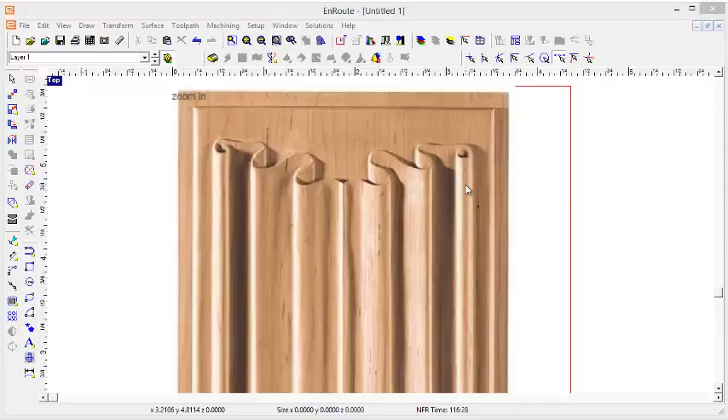In this movie, we're going to show how to create a piece of Linenfold relief for a surface for use in an architectural or woodworking setting. We're going to use this picture here that's showing what we want to create to help generate the geometry that's needed.

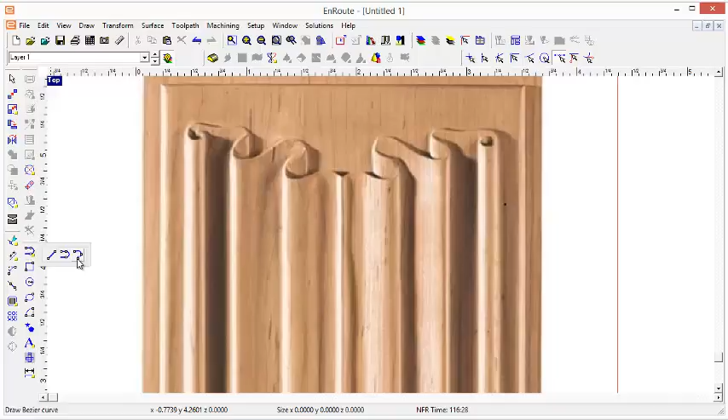So I'm going to go here to the Draw tool and choose Draw Bezier Curve. Before I get started, I'm just going to zoom in here a little bit so I can see the area I want to draw in.

I'm going to start here at this internal point, and if I just hold down on my cursor, you can see I'll create the curve as I go along here. I'm probably going to end up coming back and cleaning this up a little bit when I get a chance.

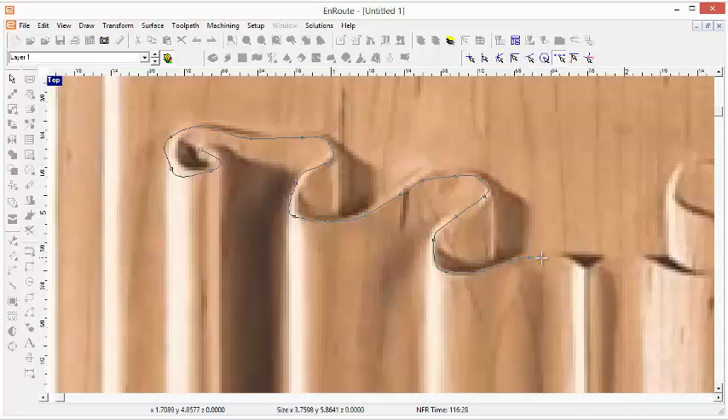What I'm trying to do is get a decent job of drawing a smooth curve to start with. So I'm just going to meet in the middle there, and now I can see I've got a little bit of a curve here. I'm going to zoom in on this, go to the point edit mode, and try to make this look a little better.

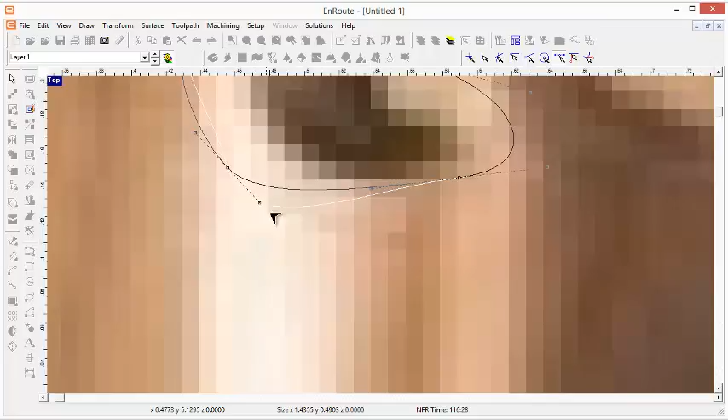So we'll start off by grabbing these nodes and shortening some of these curve motions here. There's a bit of just getting in there and making sure you have good shapes, and it could be time consuming based on how good a job you did starting this process to draw this line. But each of these little curves will have its own handles.

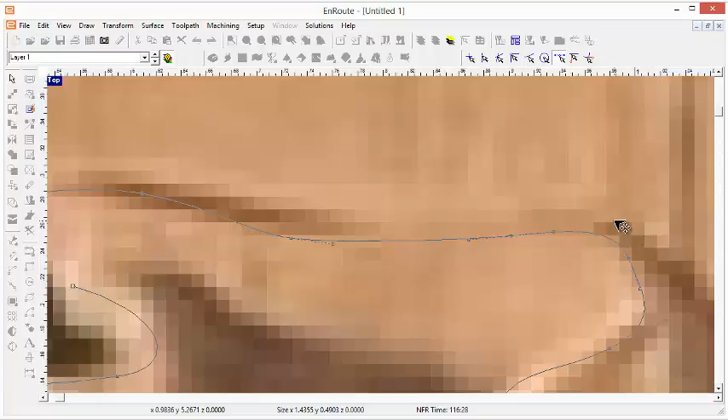If you hold the shift key down, then you can get an idea of what it'll look like for both sides to be changed.

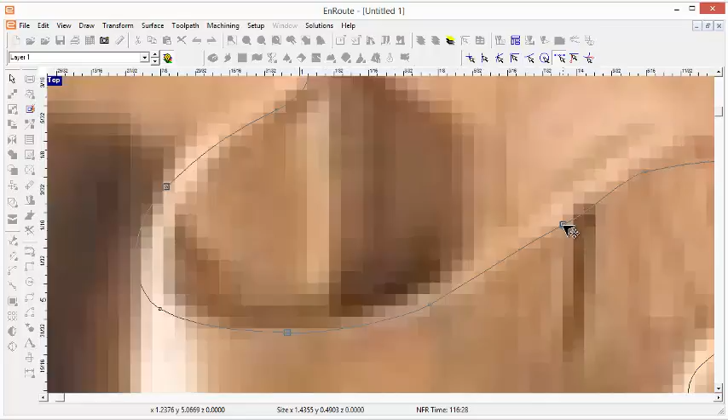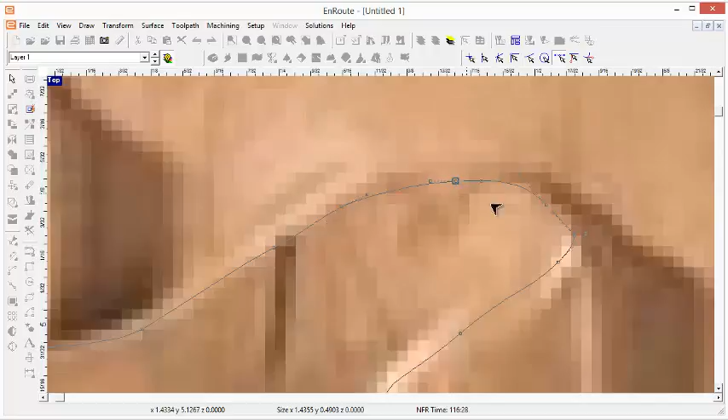Alright, so we're getting through here pretty quickly. A little bit there needs to be straightened out. This is the sort of thing where you can end up spending as much time as you want making sure everything looks good here.

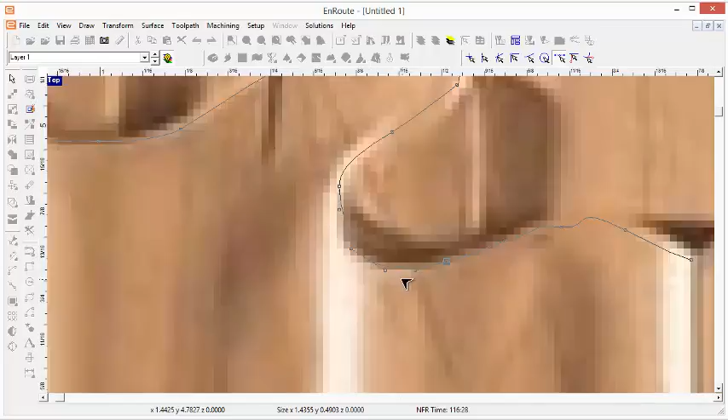So I'm going to go through this somewhat quickly, but again, this is an area where if you want to spend more time, you'll get a better result. I'm just going to delete this one last point here. Looks like we're just about to the midpoint.

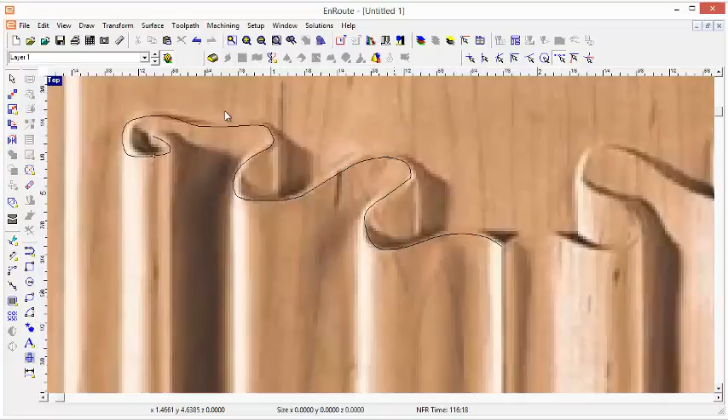And now we're going to come up here, and here's going to be where the line meets in the middle. So basically, I've just drawn a line, and I've used it to go along this whole part here. Now I'm going to take this line and just grab it by selecting this part here.

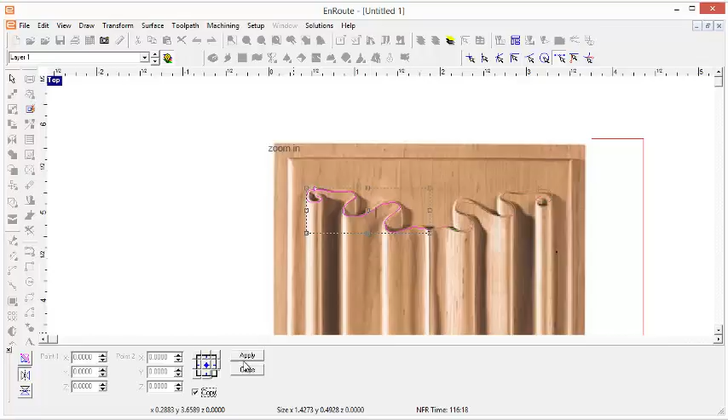I'm going to go to the mirror tool, create a copy, do a side-by-side mirror, and adjust my starting reference point here so that I go on the other side, then hit apply. So I'm kind of making each side of these more or less the same by doing this.

And if I wanted to, I could come here and change one of these a little bit versus the other, and get a slightly different result on this side to make it a little bit more custom looking.

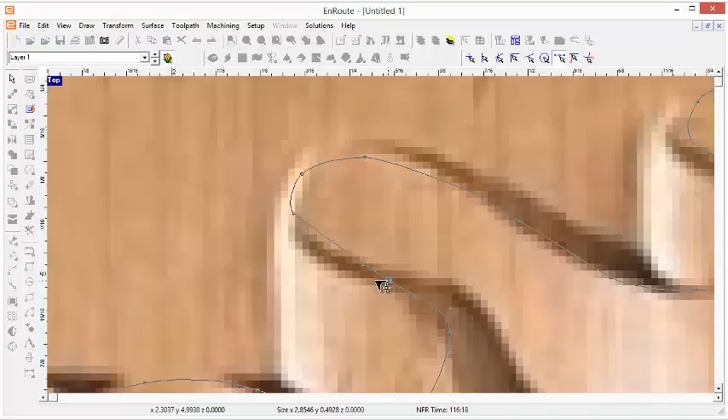Alright, so here I just kind of changed one side versus the other, but again, this gets to just how much time you want to spend doing this, so we'll just go with that one right there.

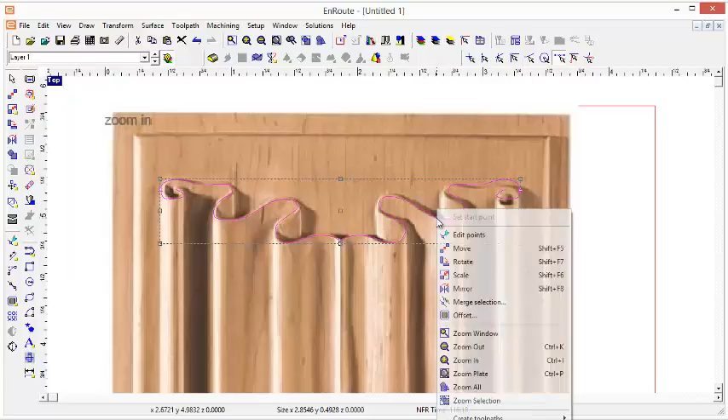Alright, so now I've got these two parts. I'm going to take them and merge the selection. Now to give it this kind of an effect, this is a flat part here.

I'm actually going to use sweep two rails, and I'm going to use this little line I drew as one of the rails. So one of the things I need to do is rotate it a little bit so that this part is up in the air and this part is lower down.

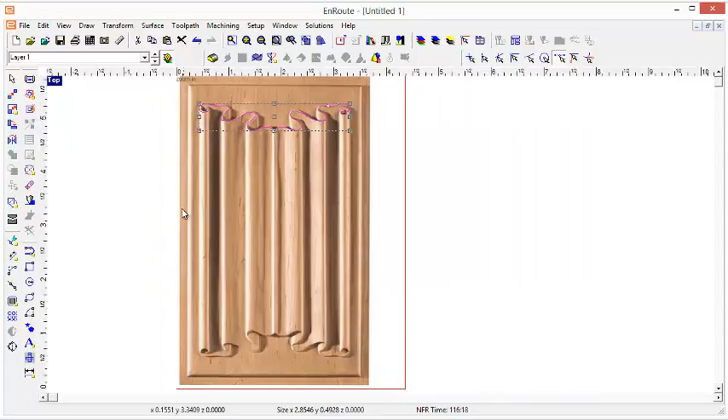So I'm going to come here to the side view, and I see this is on the upper part here. Again, I'm going to select this part and go to this view, and this represents the contour here. I want it to be taller towards the middle here, so I'm going to go to the rotate tool, click here as a reference point on screen, shift again, and then just rotate my part a little bit.

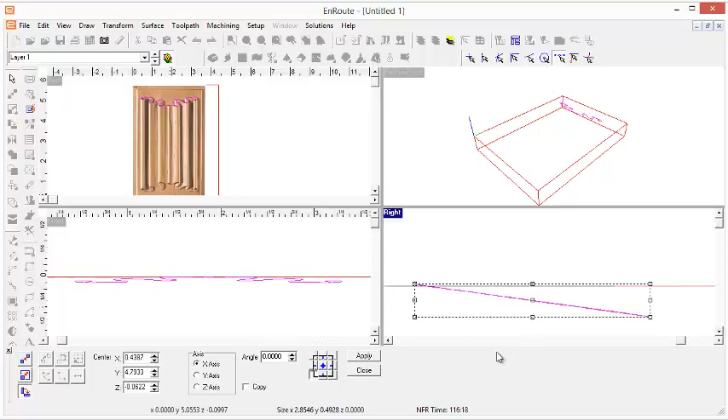I wasn't too precise there, but I'm now going to shorten that a little bit so there's just a bit of length, and move this here. So this is how I'm creating my...

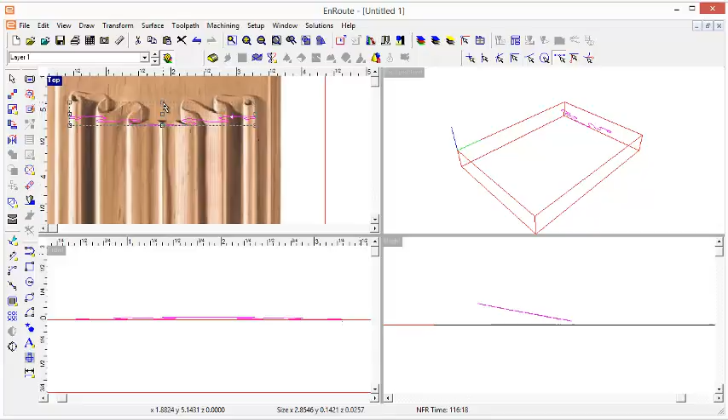So I'm going to create the Linenfold effect. And now I can see I've changed this from the side view, so I'm going to drag this back up here. I'm going to make this match from the top view, and that's going to help me get the look I want.

And however thick I want this to be, I can't really tell from this photograph. That's going to determine how thick this is in the side view here. Currently we're about at a half inch, so maybe I'll make this 0.46, that would be good.

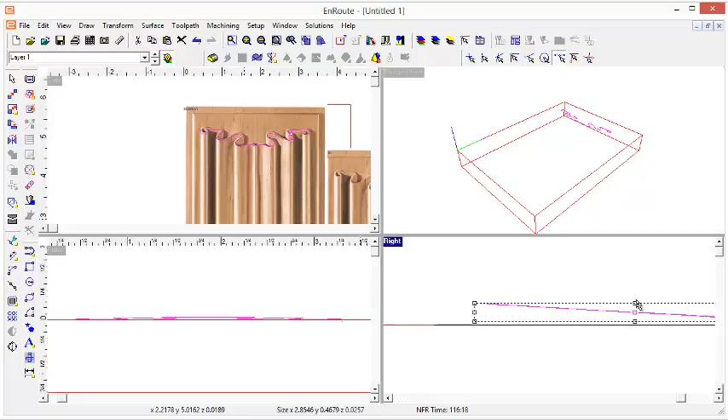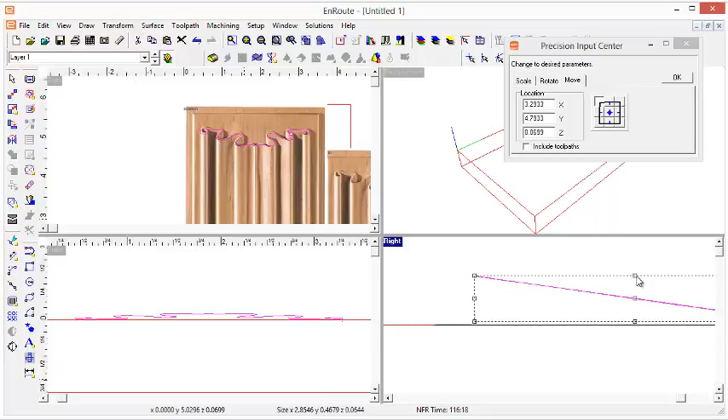And then if I hit F2 and look at the precision input, I can see this is 0.03 above 0. That's not very much, so I misrepresented how much that was. I'm going to increase that height a little bit, so now this is 0.06.

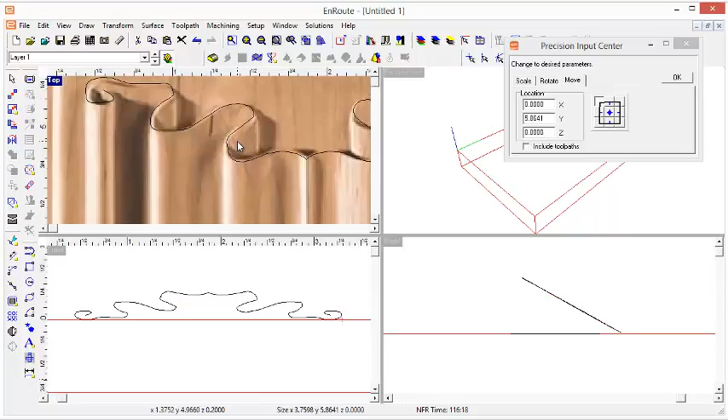Now it's going to be 0.1. I imagine that's going to be, let's say, a half-inch material. At this point you can make it however thick you want, but I'm just going to stick with this thickness.

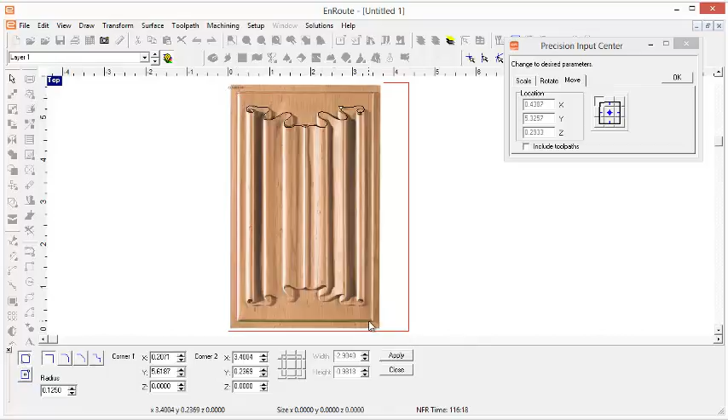Now what we're going to do is create our relief. I'll look at this geometry on screen, or this picture, and create a rectangle that's roughly the same size, like this.

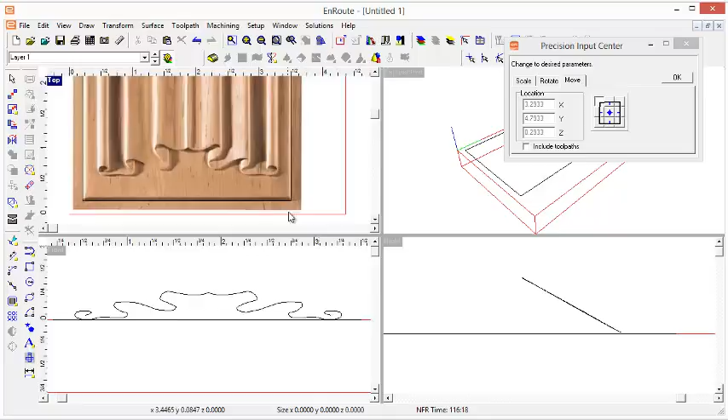If I recall, this part here is now at a top position above zero of 0.29. If I look at this part, I can also see a little rounded profile here, so let's do that part as well.

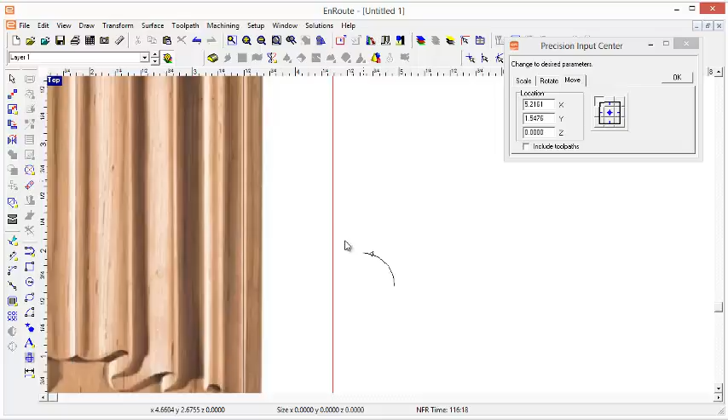I'm going to come here and create a little quarter round using the arc tool. I'll come here to create the arc, hold down in the center, hold the shift key down, go directly to the right, hold shift down, go directly top, and you've created a little 90-degree quarter round. We'll make this 0.25 in height, and that should make it both width and height of 0.25.

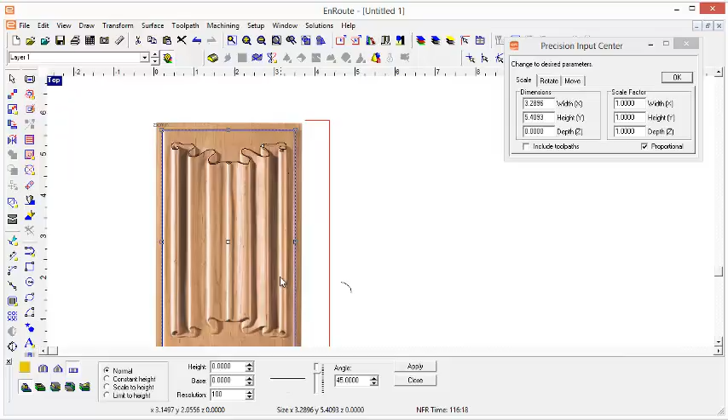Now we'll select that original geometry I just created to make the size of the panel here, and we're going to do a flat, no-thickness relief. The size of this is pretty small — that wasn't really on purpose, but it turned out that way.

That explains why this was such a small piece. Let's make this a little bit bigger here. Now this is 0.72, and I'm going to make this 0.5 in height.

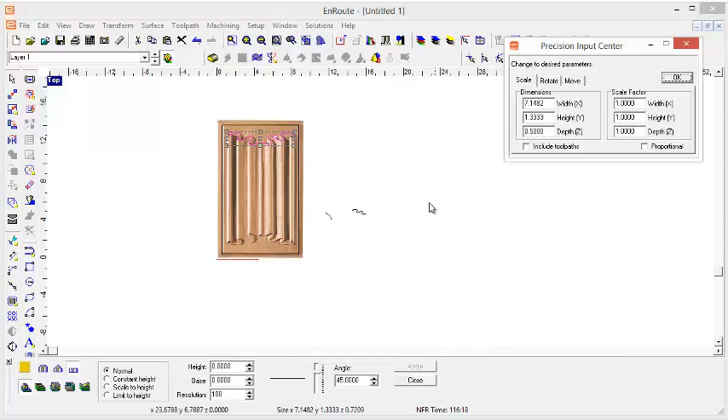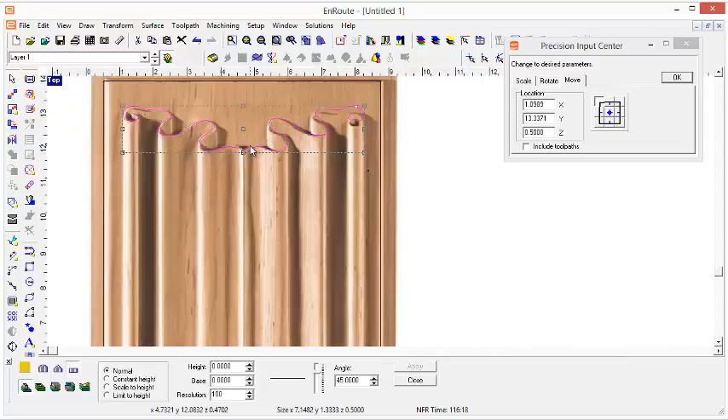We're going to make this a thickness of about 0.5 inches, and then move the top of this to 0.5. So now we've got our part designed and positioned in the Z-axis so that the top of it is at 0.5, and the bottom is just resting on the plate here.

We've created a little quarter round here we're going to use, and this has probably gotten too big, so let's make this 0.25 by 0.25 again.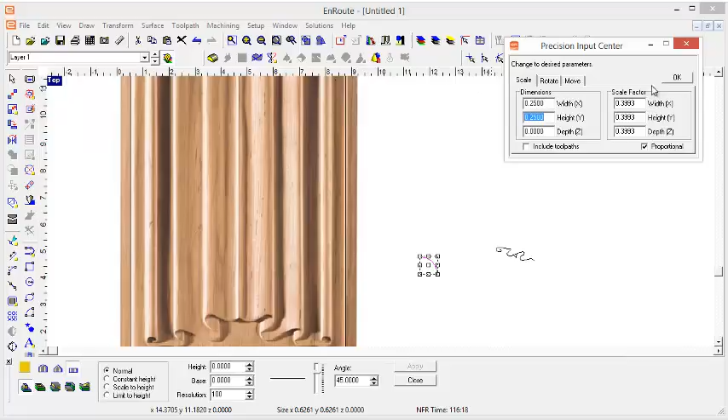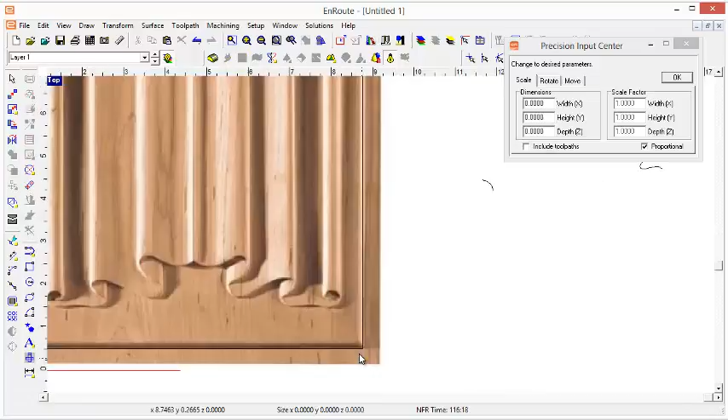Now here's our relief — we're going to do flat, no thickness, apply, and then come here and do a chamfer. Here's the contour we're going to chamfer with, and we're going to miter the corners, and this creates this little shape here.

Now let's turn this off for a second. Here's our rail on the first part, and here's our contour we're going to use.

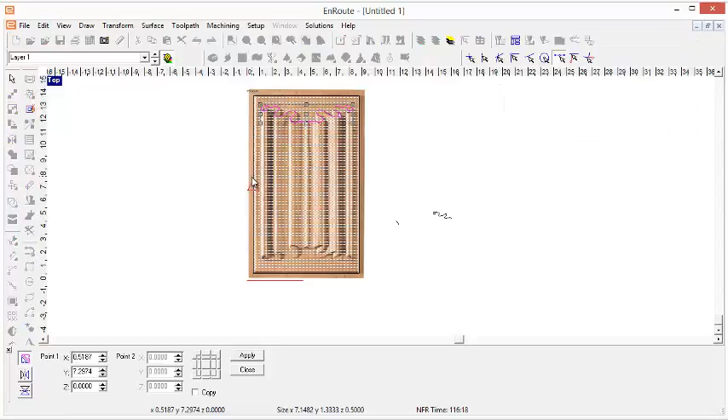I'm going to select this part and go to mirror by line. We'll snap the midpoint here, which allows us to snap on the midpoint of this part, and I just created a second piece where I wasn't supposed to.

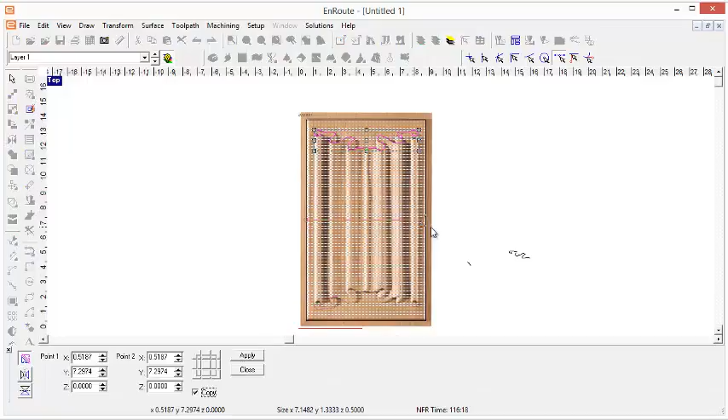Let's try this again. We'll select this part, go to mirror by line, create a copy. There's my first anchor point, and I just drag a line out here, creating a line down at the second part of this area. I can decide if I want to keep it as is or change it a little bit.

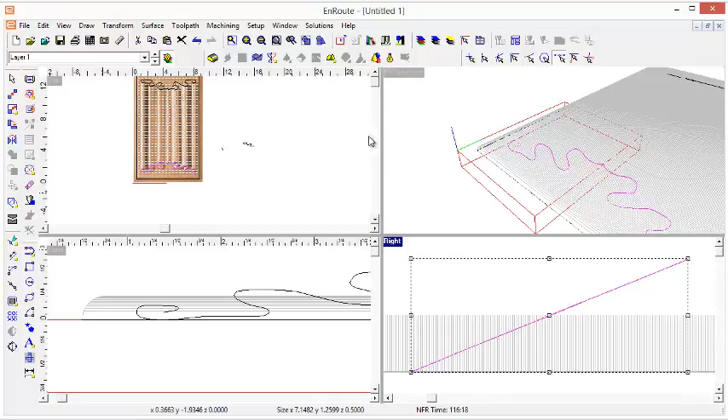So there are my two profiles. The top of this one should also be at a Z depth, or Z height, of 0.5 above the material, which it is. So here we have our two rails.

These are moving in the X, Y, and Z axis — you can see them slanted here, a little slant for each of them. Now we're going to draw a profile that we'll sweep between these two rails, which is just a straight line drawn on the X axis here.

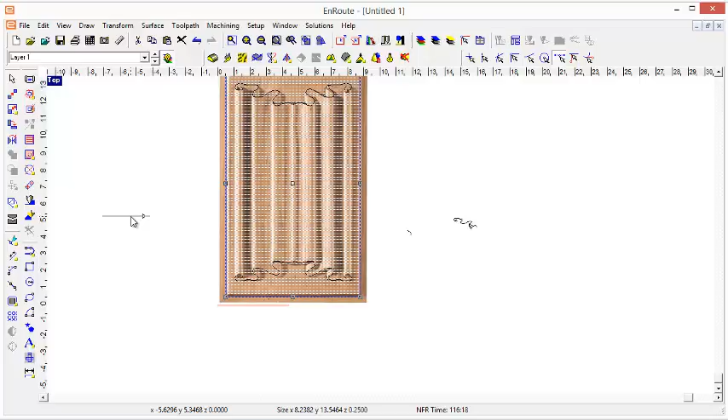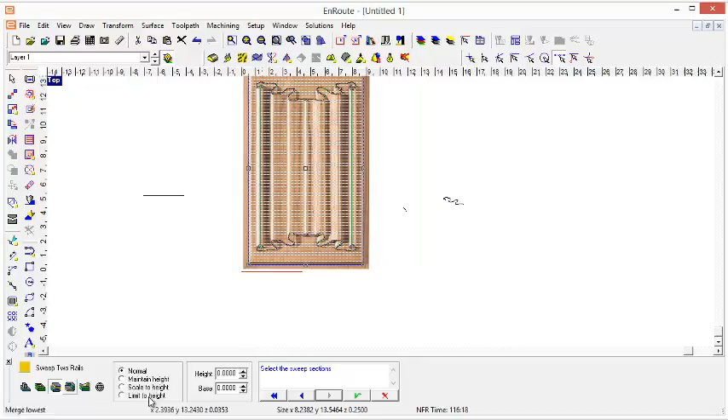Now we'll select the relief and go to sweep two rails. We have our relief selected — select the first rail here, second rail here, and the sweep sections 1, 2. We're going to do a merge lowest and hit the green check mark.

And there we have a little — oh, excuse me, that's what happened, that's merge highest. So let's try this one more time — we needed to add that.

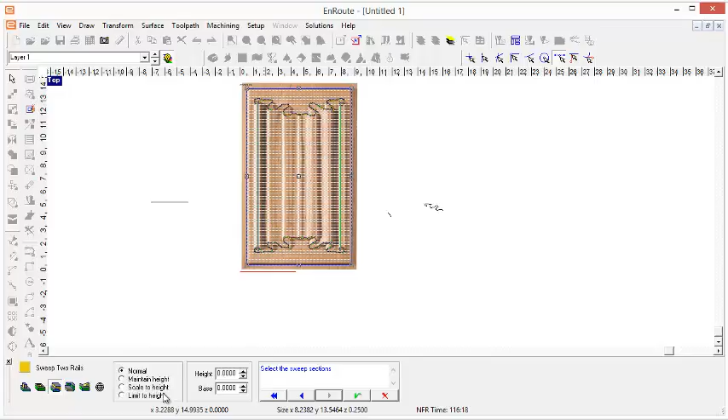So we're going to go to sweep two rails, first rail, second rail, sweep sections 1 and 2, and we're going to add this on there, green check mark. There we've created a nice linenfold effect — something you could purchase, or you could just use this one or create your own quite easily.